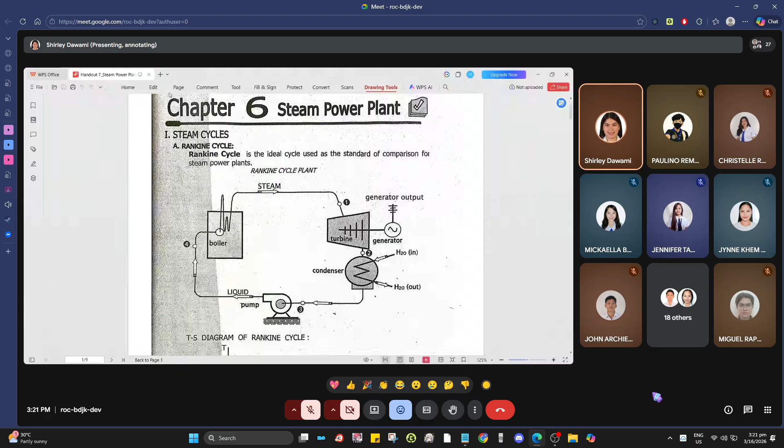Okay, so we're done with the diesel power plant and gas turbine plant. So we're now moving on to steam power plant.

So there are four different cycles used in steam power plant. And the most basic one, or the widely used cycle, is the Rankine cycle.

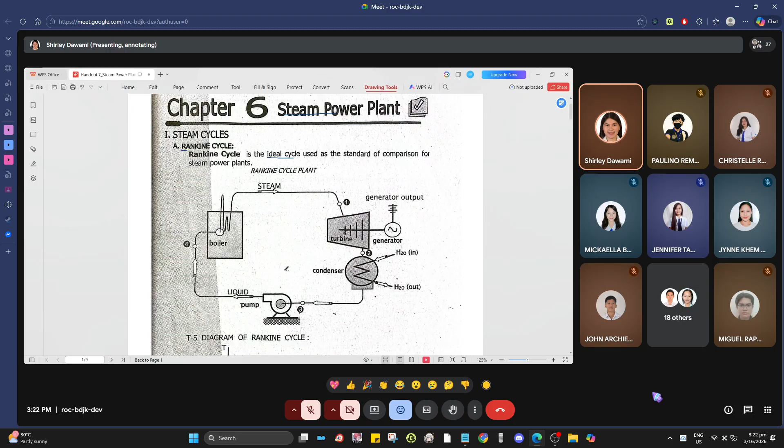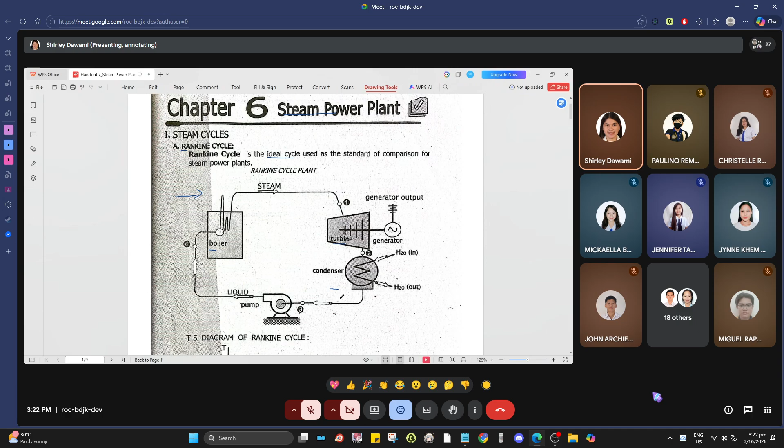It is the ideal cycle used as the standard of comparison for steam power plants. So this is the simple schematic diagram of a Rankine cycle, which has a pump, boiler, turbine, and condenser. Also here is the TS diagram of a Rankine cycle as well as the processes.

Okay, so let's start with process 1 to 2. This is an isentropic expansion in the turbine. If you look at the schematic, the boiler is responsible for heating water.

To generate steam, the steam that comes out is a superheated steam, high pressure, high temperature steam. We can see it in the TS diagram, at point 1, which is in the superheated region.

So it enters the turbine. The turbine produces work by expanding steam at high pressure and temperature. So the steam enters the turbine, which causes the blades to spin to do mechanical work. And that mechanical work will now be converted to electrical energy.

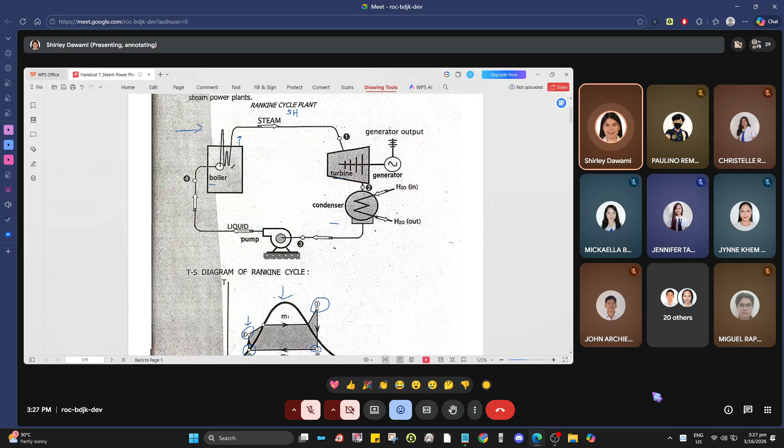And then process 4 to 1, which is a constant pressure addition of heat in the boiler. So by burning, for example, fossil fuel, the water, which is a subcooled liquid, is heated here. Then it comes out as superheated steam.

Okay, so that is the Rankine cycle. We should familiarize ourselves well with the Rankine cycle at this point, because all the remaining cycles used in power plants are all improvements from the Rankine cycle.

So for the analysis of the Rankine cycle: heat added in the boiler, QA, that is H1 minus H4. If mass is given, then multiply by mass, where M is the mass flow rate of steam in kilogram per second.

For the heat rejected in the condenser, QR, that is H2 minus H3. Since it comes from the boiler as H1, it enters the turbine as H1.

This enters the condenser as H2, which is wet steam. So we get H2 minus H3. The basic thinking here is out minus in, so it depends.

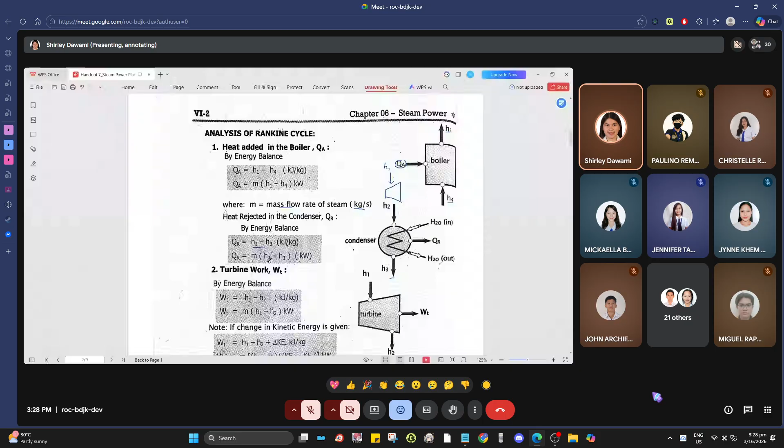Similarly for QA, that is H1 minus H4. And for the heat rejected, what enters minus what exits, so H2 minus H3. For the turbine work, H1 enters, and H2 exits. So H1 minus H2, that is the turbine work.

If change in kinetic energy is given, that is H1 minus H2, which is the turbine work. H1 minus H2 is the turbine work plus the change in kinetic energy, or kinetic energy at point 1 minus kinetic energy at point 2. That is if there is a change in kinetic energy.

For the pump work by energy balance, it can be exact pump work or approximate pump work, depending on what is given in the problem - in terms of enthalpy or in terms of pressure. For the exact pump work, that is H4 minus H3. This is for the pump work, since H3 comes from

the condenser. It comes from H2. So H3, H4, that is H4 minus H3. For the approximate pump work, in terms of pressure, that is volume times the pressure at point 4 minus the pressure at point 3, or if mass is given, multiplied by mass.

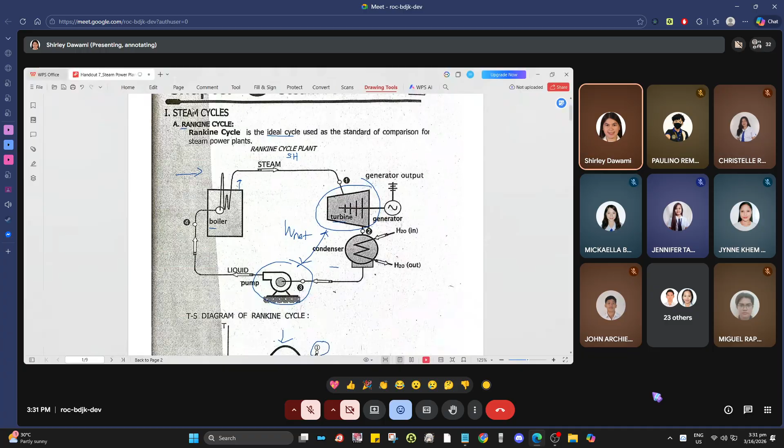Turbine work equals H1 minus H2. Now for the pump work, it still depends if it's exact pump work or approximate pump work. For the actual pump work, that is pump work divided by the pump efficiency. That is the actual pump work.

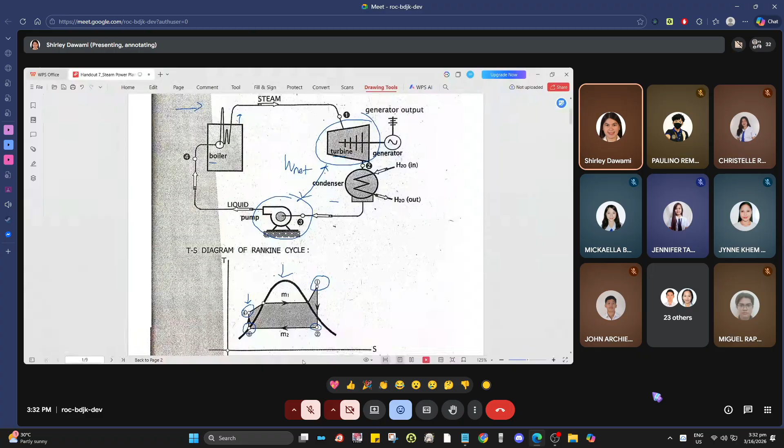For the thermal efficiency, that is work net over QA, where work net is equal to H1 minus H2, which is the turbine work minus the pump work, divided by QA, H1 minus H3. QA is H1 minus H4. Wait, what about H3... H1 minus H3.

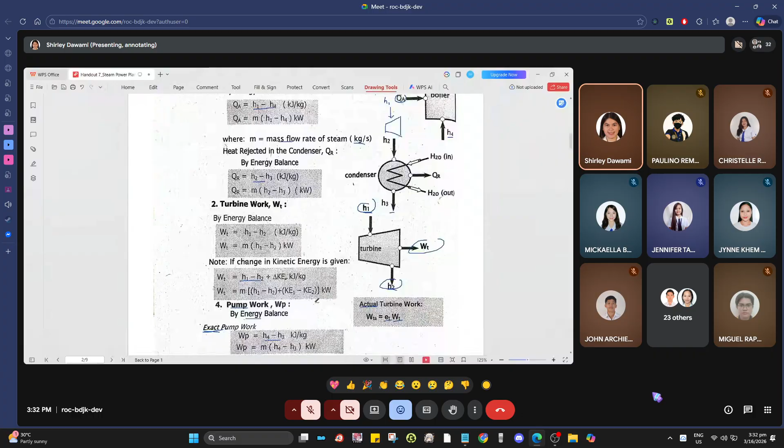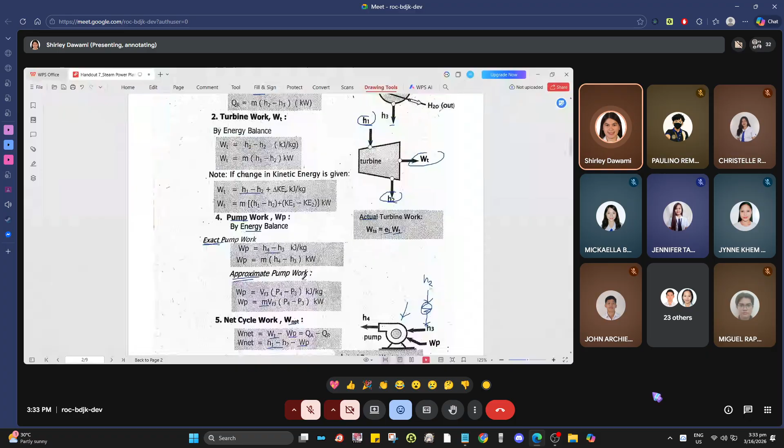So this should be H1 minus, QA is equal to minus pump work. So for the thermal efficiency, work net over QA, where work net is equal to turbine work minus pump work divided by QA. So H1 minus H3, minus pump work. And QA is equal to H1 minus H4.

This should just be QA, work net over QA, so QA is equal to H1 minus H4. Our work net is equal to QA minus QR over QA. So H1 minus H4 should probably be this. For the steam rate, that is equal to 3,600 divided by the work net.

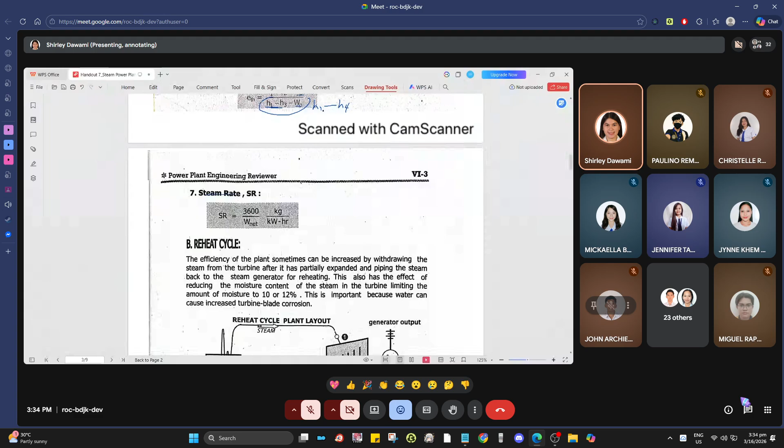So next we have the reheat cycle. The efficiency of the plant can sometimes be increased by withdrawing the steam from the turbine after it has partially expanded, and piping the steam back to the steam generator for reheating. For the reheat cycle, our key here is the reheater.

Meaning there is a reheater, and this reheat cycle also has the effect of reducing the moisture content of the steam in the turbine, limiting the amount of moisture to 10 or 12%. This is important because water can cause increased turbine blade corrosion. If the turbine blade is corroded, the efficiency will definitely decrease.

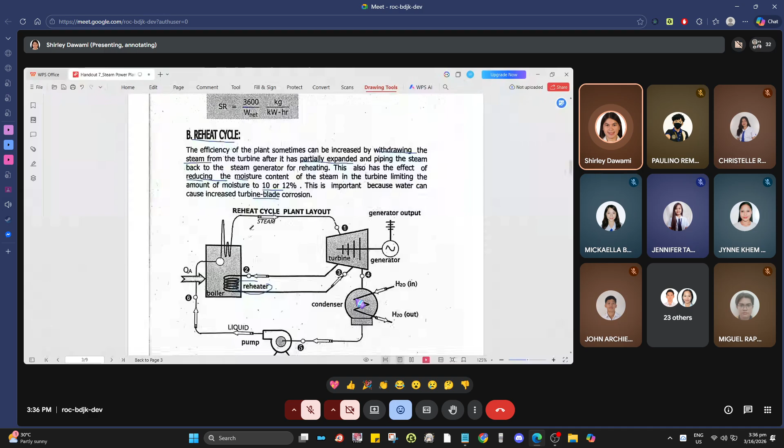So the process from 1 to 2 is partial isentropic expansion in the turbine. In the Rankine cycle, it's automatically a complete single expansion that happens in the turbine. But for this reheat cycle, the first process is a partial isentropic expansion.

Process 1 to 2: the superheated steam, let's verify it's a superheated steam, enters the turbine and will be partially expanded. Even though it's partial, it means the energy has not been fully used up, there's still energy that can be extracted from the steam. But although it's still partial, it already gives mechanical work to produce electrical energy. Then it exits, so process 1 to 2 is partial expansion.

Process 2 to 3 is the reheater. At point 2, it's still vapor, almost like saturated vapor, meaning its energy content is still high. It's not like in the Rankine cycle where after complete expansion in the turbine it becomes wet steam. Here in reheat, since it's only partially expanded, it hasn't fully expanded yet.

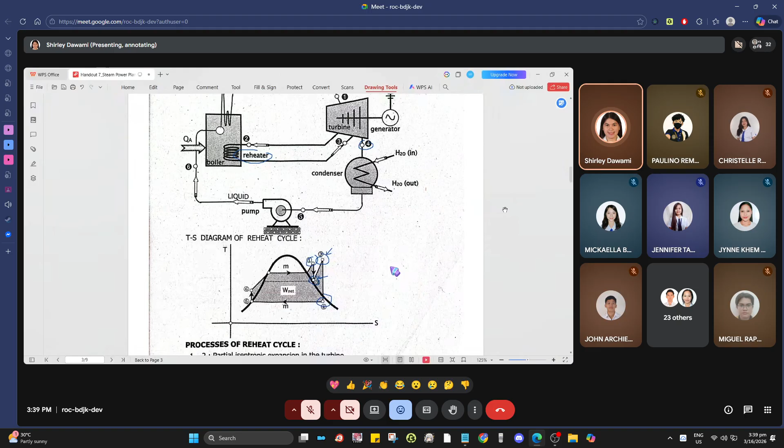Process 3 to 4 is a complete isentropic expansion. So when it enters back into the turbine, from point 3 it undergoes complete isentropic expansion in the turbine. So it exits from 3 to 4 as wet steam. Since the energy has been extracted from the steam, it drops significantly.

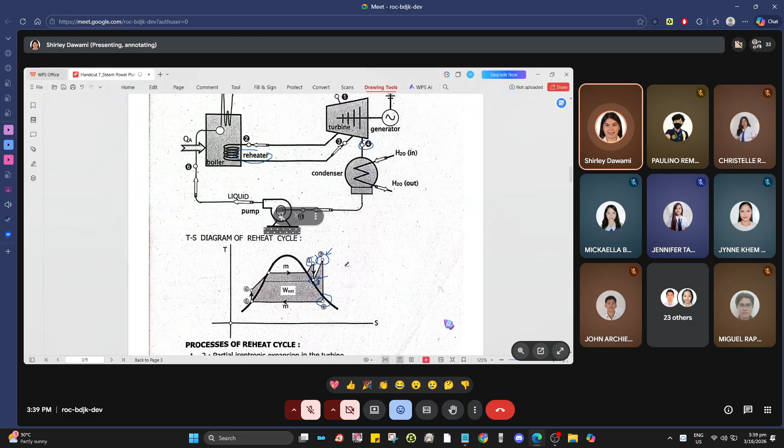So it enters as wet steam into the condenser, then is cooled or condensed back to water. Process 4 to 5 is a constant pressure rejection of heat in the condenser, so it exits the condenser as saturated liquid. Then that saturated liquid undergoes process 5 to 6, which is adiabatic pumping, where the water is pumped back to the boiler, reaching point 6 at the boiler. So that's it, 6 to 1 is a constant pressure addition of heat in the boiler.

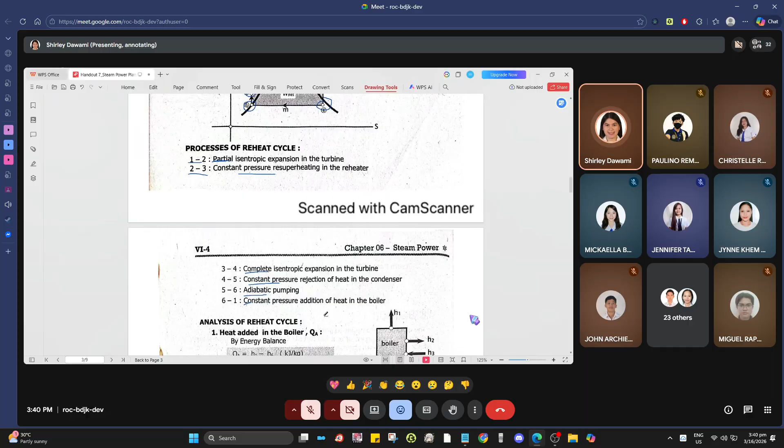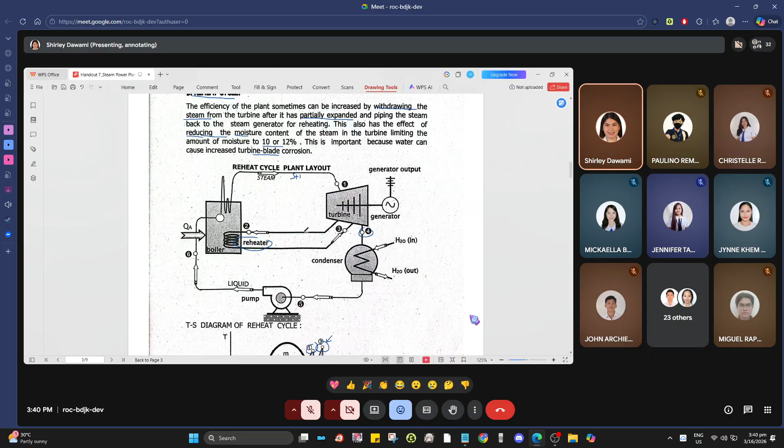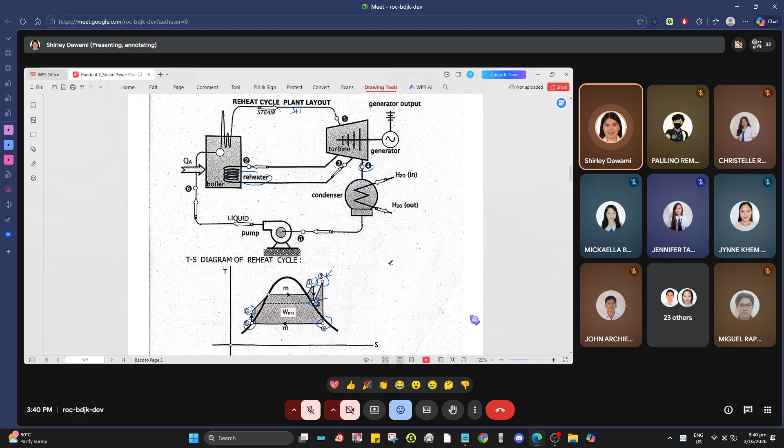So that's the reheat cycle. Because of the reheating process, it avoids excessive moisture formation which could cause blade corrosion. Aside from increasing its efficiency, since from point 1 after superheating at point 3, the enthalpy becomes much higher at point 3 after superheating, so obviously the efficiency increases. And besides that, it decreases the moisture content.

So here, energy is extracted, there is a turbine. Okay, that's it for the reheat cycle. What's next is the analysis.

For the heat added, that is H1 minus H6. For the heat rejected in the condenser, that is H4. Wait, this is wrong, no. This is H4 because it comes from there. So H1 exits the boiler, enters the turbine, exits the turbine as H2.

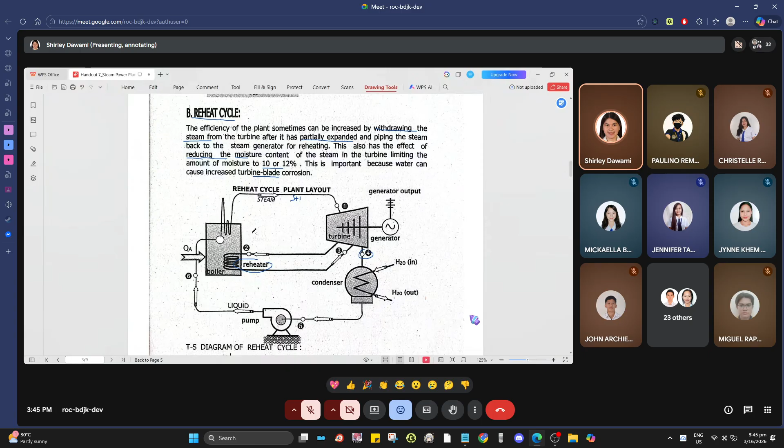Moving on to the regenerative cycle. Cycle efficiency can be increased by bleeding a fraction of steam from the turbine and using the steam for regenerative heating of the feed water.

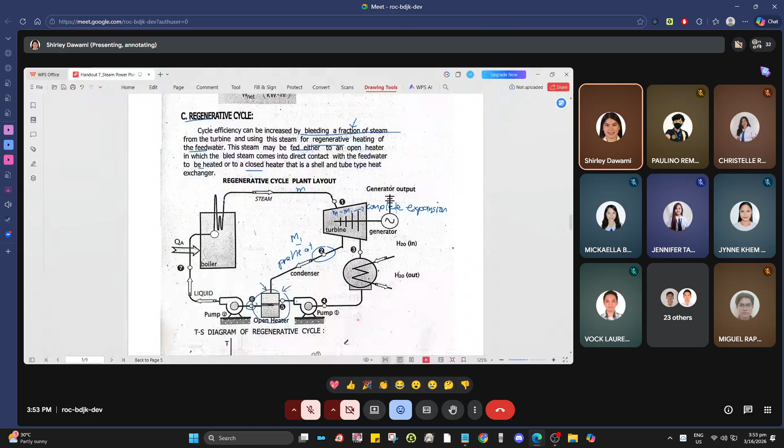3 to 4, constant pressure rejection of heat in the condenser, then 4 to 5 adiabatic pumping in the first pump. For regenerative cycle, naa duha ka pump, no? Inyong timan-an nga for regenerative cycle, naa siya nadugang nga pump o na ay feed water heater. Pwede ramang good og dili ginatuon memorize ang tanan kaning TS or processes, pwede ra pud diri ta mag-analyze sa iyahang schematic.

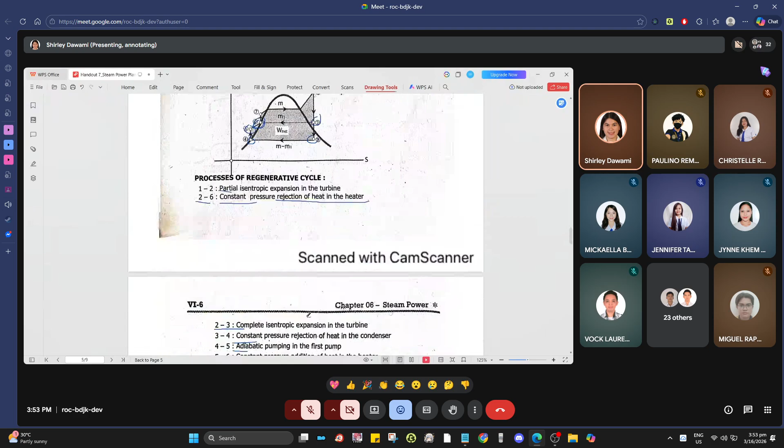Okay, so saan naman ta? So 5 to 6, constant pressure addition of heat in the heater, which is constant pressure heat addition of heat in the heater. Yes, 5 to 6. Then 6 to 7, mao na ni ang pump back to, or water is pumped back to the boiler.

So for the analysis, heat added is equal to MH1 minus MH7.

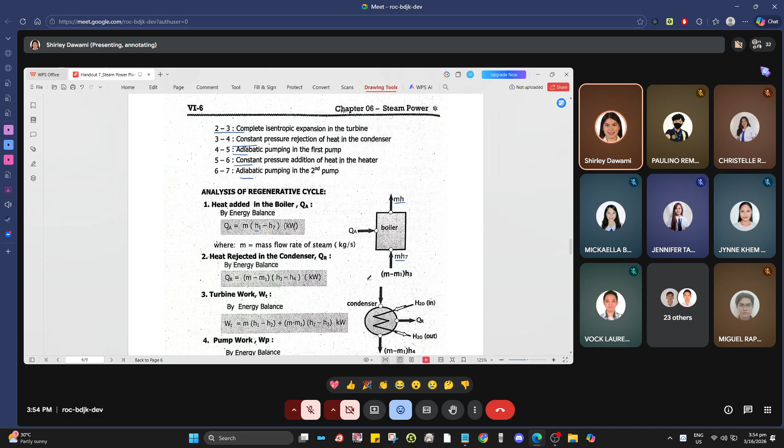Okay, so M, dili maglibog sa mass nga gamiton. Dapat nasabtan nato diri kung lisod siya nga M, na ay M1 nga nigawas diri. Unya ang gi-used for complete expansion is M minus M1. Pasabot all throughout the process, one na ginang mugawas ana, no? So heat rejected in the condenser is M minus M1, kay matong giingon nga ang gigamit nga steam is, or the steam used is M minus M1 naman lang, times the H3 minus H4.

For the turbine work, turbine work is M times H1 minus H2. So na H1 for partial expansion, H2. Then for complete expansion, ang gigamit is M minus M1 times H2 minus H3.

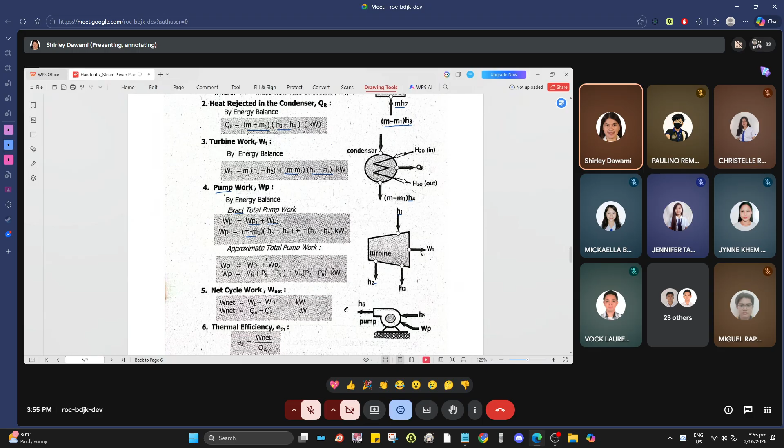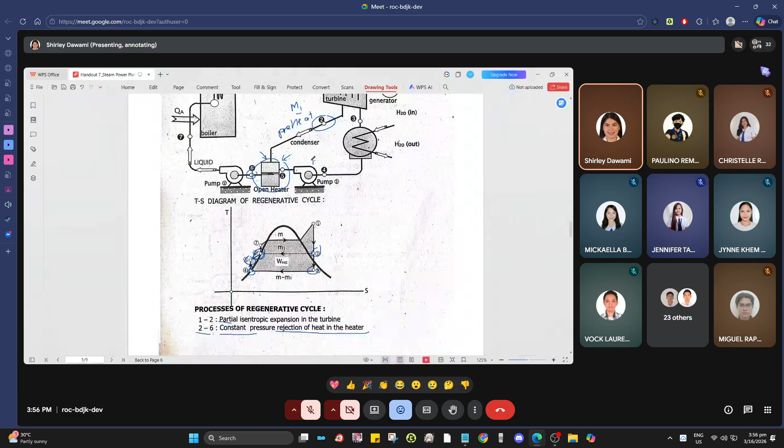For the pump work, exact total pump work is pump work 1 plus pump work 2, where pump work 1 is, bantay mo no, kaning pump work 1, work is M minus M1. So this is the pump work 1, and then the pump work 2. Pump work 1 daw is M minus M1, of course, kay mao man na iniagi diri, no?

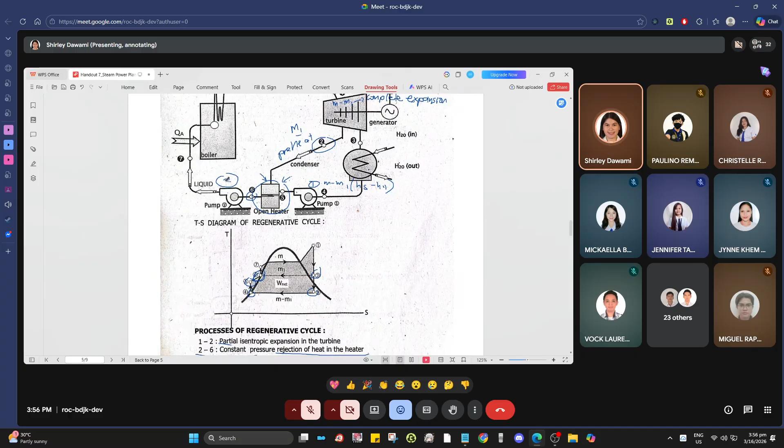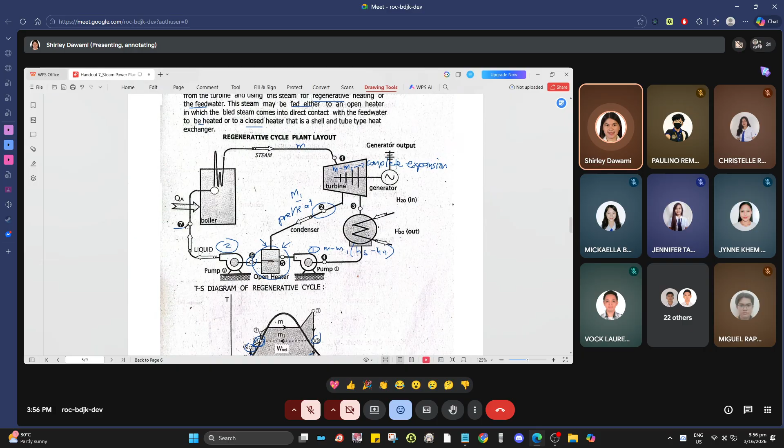M minus M1 diri sa condenser, so that is M minus M1 times H4, H5 minus H4. Plus M times H7 minus H6, this is our pump 2. So M, ganong M, M times H7 minus H6. This one, no? H7 minus H6. So that is M.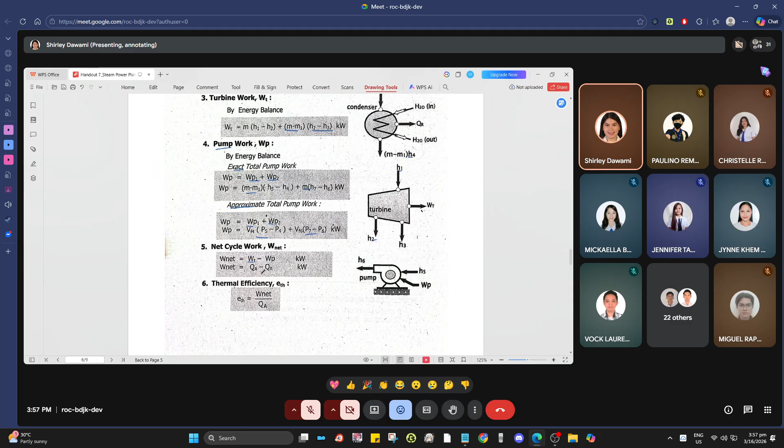For the approximate total pump work, pump work 1 plus pump work 2, in terms of pressure, the same na siya. For the net cycle work, that is turbine work minus pump work, or QA minus QR. For the thermal efficiency, work net over QA. Steam rate is equal to 3,600 divided by work net.

For the mass extracted of steam, M1, so this is how to get the M1. Usually given man sa problem ang mass of steam, or the M jud. So let's say we have an open heater, feed water open heater. So this is musod dira ang M1H2, kay mao man ni ang gikan sa turbine.

Di ba naman diri ang H1, then H1 to H2 is a partial expansion. So mo nang na H2 nga mo gawas din, so mo nang M1 H2 niya. M1 sad ni siya kay mao man ni ang bled steam, or fraction of steam used for preheating. Then kani siya nga part diri, this is from the pump.

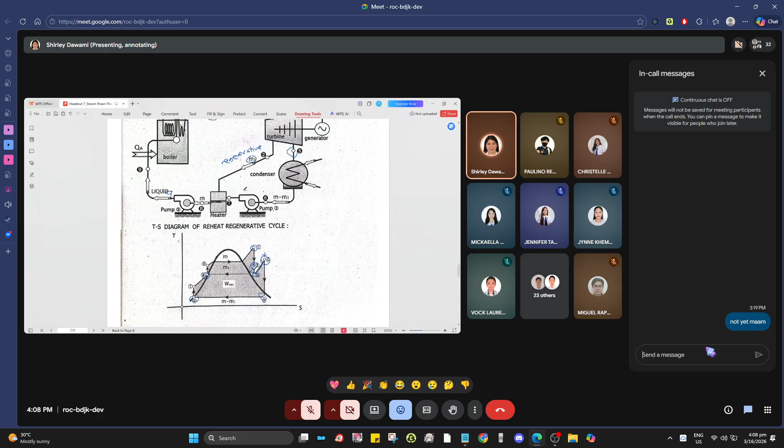For the approximate, is equal to P9 minus P6. So kato na ning lahos P9 kani dari kani nga point og kani nga point. Kung given ra na sa problem, so diretsoon ra na siya. Then for the net cycle work, that is turbine work minus pump work, or QA minus QR.

For the heat added in the reheater, or QRH, so reheater, zaman tong ibagikan man ni siya sa turbine. That is after intermediate expansion, diba? This is after the intermediate expansion kay H1.

Na, so M minus M1. Ay bali, so muna siya ang gikan sa turbine. Ay nanagkadimao, muna siya ang gikan sa turbine. Uy ano naman, ano lang kanang sa drawing, sa illustration na rin. Okay, basta kay kaning H3, mauni siya ang gikan sa turbine.

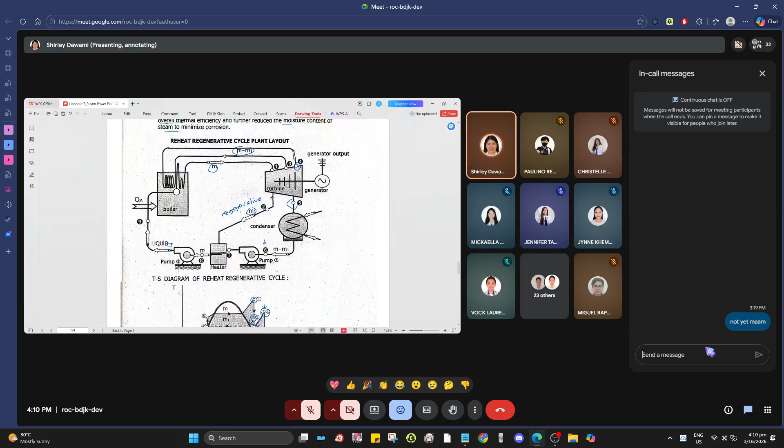Haluin siguro ni. Ang nisod is H3, ni gawas is H4. H4 minus H3. So M minus M1 times H4 minus H3. Kaya ang H3, mao man ni siyang musod sa resuperheating process, H3. So H4 minus H3, so sakto ang formula, no?

Sa ato ang schematic. For the total heat added, Q total is equal to QA plus QRH. So na QRH kaya na may heat added, dinha sa feed water. Wait lang. Oo, kaya na siya resuperheating process. Then sa boiler, yeah, resuperheating.

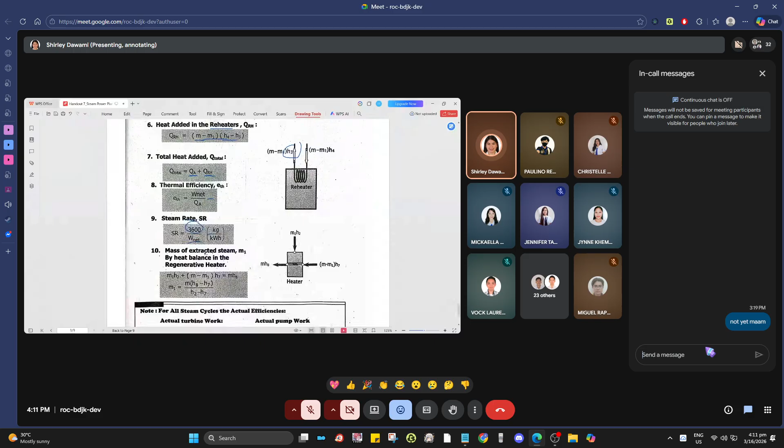For the thermal efficiency, that is work net over QA. For the steam rate, 3,600 divided by work net. So careful mo, no? Make sure that your work net is consistent, in consistent formula, I mean unit, nga kilojoule per kilogram.

For the mass of extracted steam, or M1. So mo ni siyang extracted steam, M1. So by heat balance in the regenerative heater, so mo man ni ang M1, ang fraction of steam nga nisod for preheating. Mao po ning M minus M1, mao ni siya ang ni-undergo sa complete expansion. So mugawas gikan after sa turbine, or after complete expansion is mao gani siya M minus M1.

So, M1 H2 plus M minus M1 times H7 is equal to M H8. Therefore, M1 is equal to M times H8 minus H7 divided by H2 minus H7.

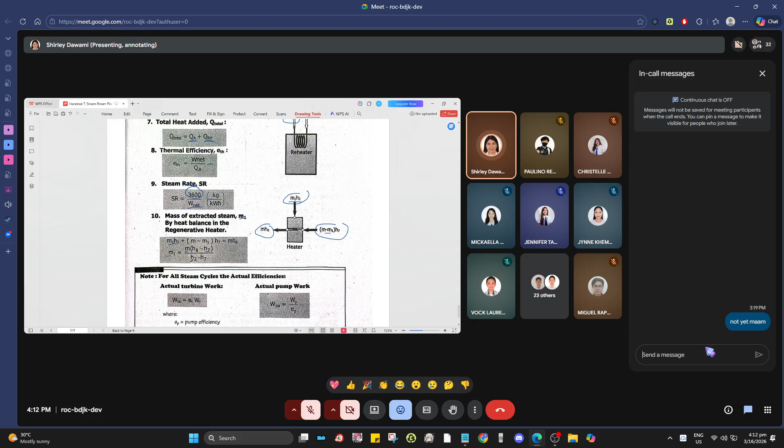So for all steam cycles, the actual efficiencies are: for the actual turbine work, that is turbine efficiency times the turbine work. For the actual pump work, that is pump work divided by the pump efficiency. Okay, so those are the 4 cycles used in the steam power plant. Do you have any questions?